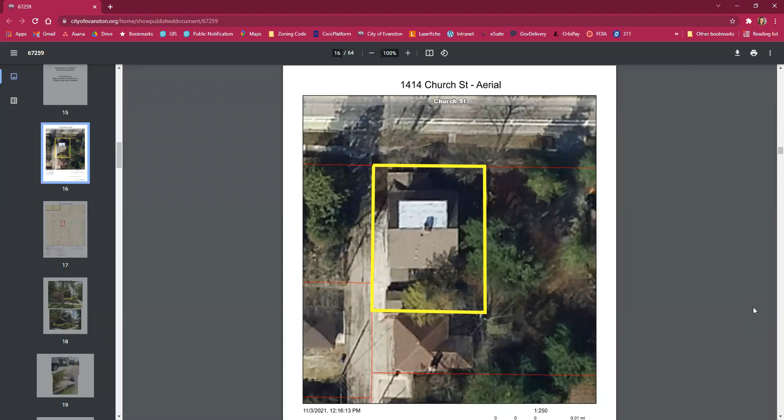Okay, before we launch into this, Cade, you've worked on this, right? Yeah, correct, I help guide the applicant through the HPC process. Okay, and then Katie Ashbaugh, you've worked on this as well?

Okay, yes. So why don't you translate for everybody else what I just said when I read into the record that information. So Cade worked on this with regard to the certificate of appropriateness that's required from the Preservation Commission, and this also requires zoning variations.

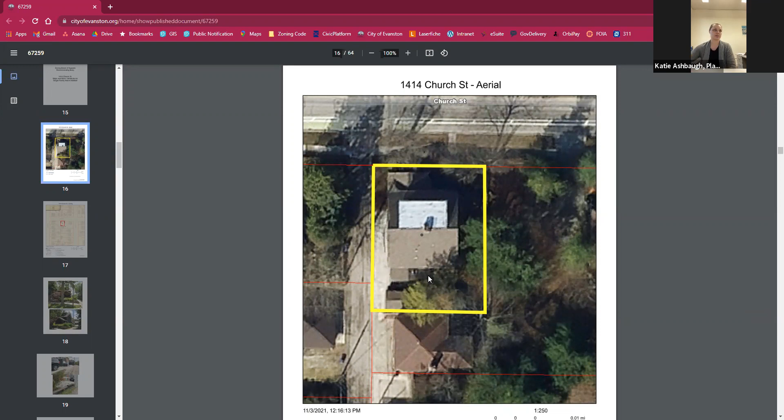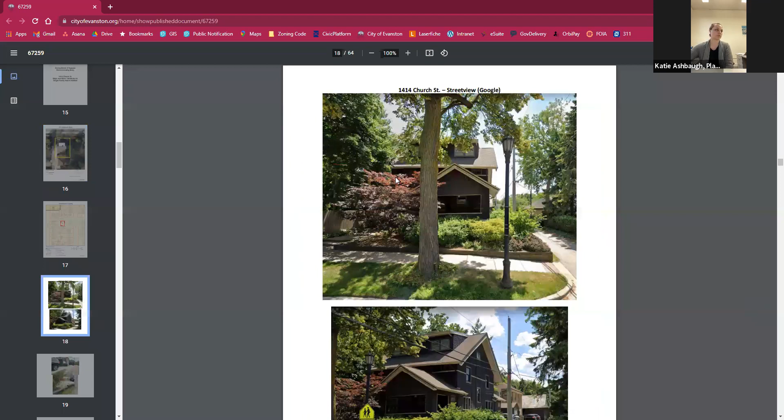Essentially they have a non-conforming detached garage in their rear yard to the south of the existing house. They're proposing to demolish that garage and build an addition to the existing house so that the garage is now attached. The attached garage will make the principal structure 3 feet from the rear lot line.

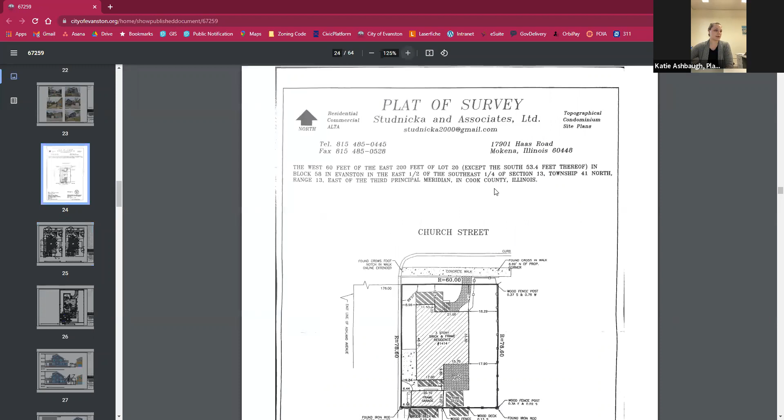Where a setback of 30 feet would be required. Let me see if I can zoom in on the plat to help with this a little bit. So here's the existing detached garage. It's less than 3 feet from the south lot line, which is non-conforming.

They're proposing to - I think this is the better sheet - demolish that and then attach the garage, which would also be a 2-car garage. Right now there's also open parking pads to the west of the house that were actually denied prior, and it appears that at some point the property owners installed them without a permit.

So the impervious surface was not what we would consider legal non-conforming. I spoke with the architect who will be presenting later, but he is now proposing to remove those - they weren't allowed regardless - but their impervious surface is still a little bit over what would have been allowed, and their building lot coverage is also exceeding the maximum permitted. That's kind of a summary without the exact math, but the architect Dan Tornheim is also on the call, and he can perhaps explain the need for this improvement and what the homeowners are hoping to do.

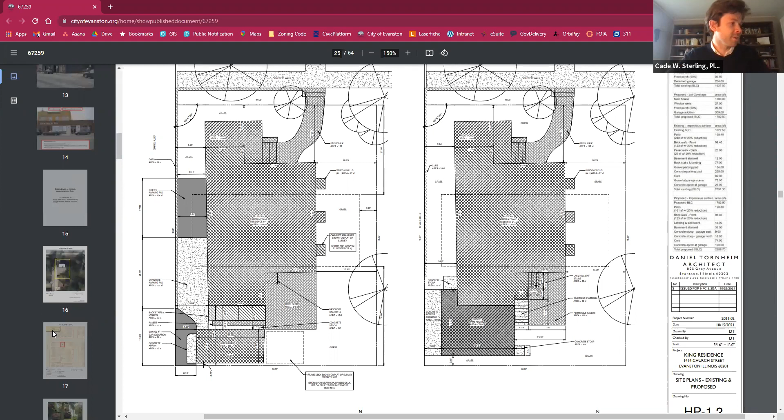And this parcel was actually subdivided at one time from the adjacent parcel to the east, sometime in the late 1800s. Our records initially show that it was constructed as an accessory building for that home on 1632, and then at some later time was converted to single family use. It's seen pretty significant alterations, primarily in the 1950s. It is a significant structure.

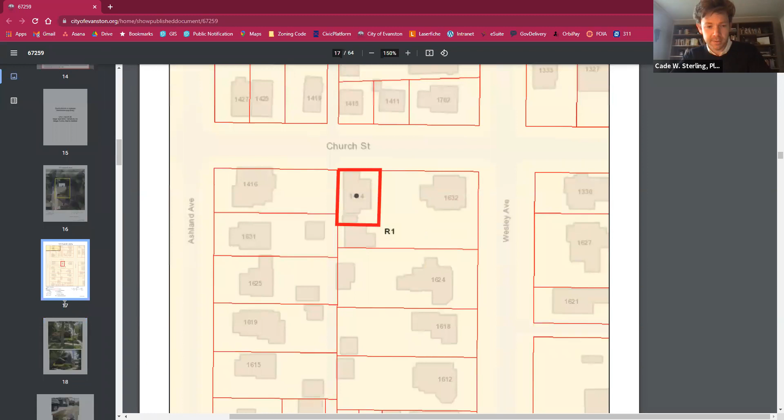It was built in the 1890s by Myron Hunt, a pretty significant architect, and it's in the arts and crafts style. The Preservation Commission last night reviewed the application, including the application for major zoning relief. They ultimately made the decision to give a recommendation of no recommendation - so neither a recommendation for nor against the proposed zoning relief. They did approve the request for a certificate of appropriateness with conditions that the applicant reduce the depth of the proposed eaves, which were originally drawn to match the existing principal structure, I think around 2 feet in depth.

Reducing those, they felt, would provide an adequate relationship between this structure and the proximate coach house to the south, which is also legally non-conforming. It's access stair, and then there's two canted balconies that are on the lot line.

So right now, if I remember correctly, the detached garage is less than a foot away from that structure.

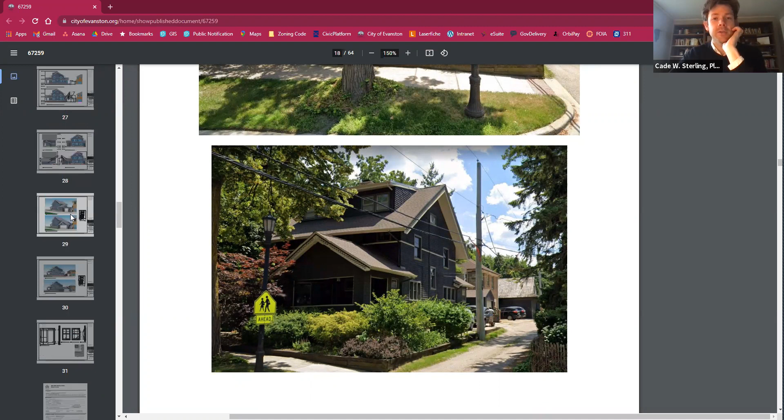Other than that, ultimately they determined the height of the proposed addition, including the roof pitch and ridge heights, were compatible with the coach house to the south. They also determined that the relationship between the two and the open space between, as proposed if they reduced the eaves, was appropriate.

And finally, the scale of the structure they also found to be compatible and appropriate. So in terms of recommendation, we started to get into the weeds of what the need was or what the hardship was, and they ultimately determined that those kinds of questions, including the alleged hardship, were outside of their purview, and they wanted to defer that to the zoning board without a firm recommendation.

Thank you both. Dan, do you want to add anything to that?

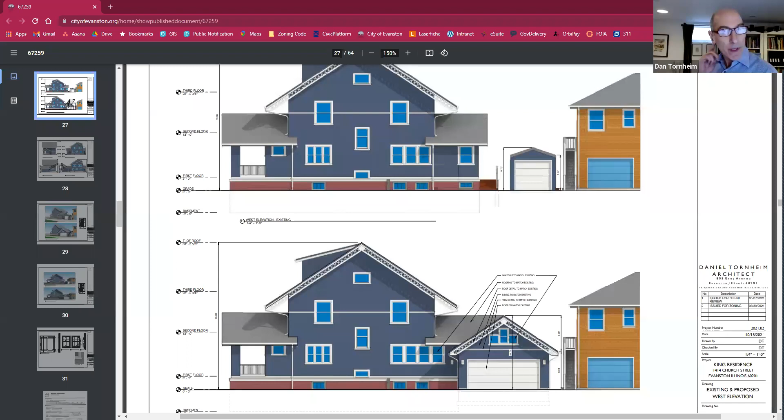Yeah, maybe we should take a look at the site plan, because I think it's helpful to see what the possibilities are in terms of the location of a garage on this property, which was one of our biggest struggles when the client came to me and said, I would love to see if we could get a two-car garage on this property, something similar to the neighborhood.

Most people have a two-car garage. And I looked at it, and some of my initial thoughts were placing the garage in maybe the northeast quadrant of the property. But the problem is that the house is just under 19 feet away from the property line. Can't really get a good two-car garage in there in that distance. It would require a curb cut off at Church Street, which ultimately I thought probably isn't the best solution.

I've got an alley I can work with. So I also thought about placing the garage in the southeast quadrant, but that's basically the yard.

That's where the kids play, that's where the family hangs out, that's where their patio is. So it just kind of ate up all the yard space, and it was closer to the neighbor's principal structure to the east. So I thought maybe the best opportunity would be to attach the garage to the principal structure, and that's where I'm proposing it now, in the southwest quadrant of the property.

One of my concerns was, I wasn't going to place the garage directly on top of the existing foundation of the one-car garage. It's too close to the property line, like 0.77 feet away or something like that. So it's under a foot away.

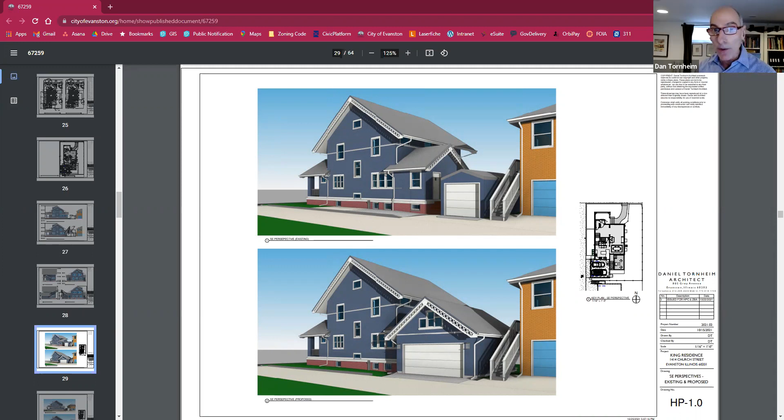Yeah, I mean, I'm not opposed to bringing back the eaves even more. I don't want to mess up the look of the structure. I don't think it will, because the eaves on the principal structure are pretty big. The porch in the front is where I took the eave dimension from to emulate to the garage. So it's like a 2-foot overhang right now. If it's at a 6-inch overhang, I'm not opposed to it. I don't know what historic preservation would say, but I'm okay with it.

Barring any other questions, I'd like to make a motion to send a positive recommendation to ZBA for 1414 Church Street. Oh, there is one thing I just thought of, and I apologize, but I want to note that downspouts have to stay on your property. They can't be sending water to other people's properties. So just be very cognizant, particularly at the edge of the garage, of where the downspouts are going.

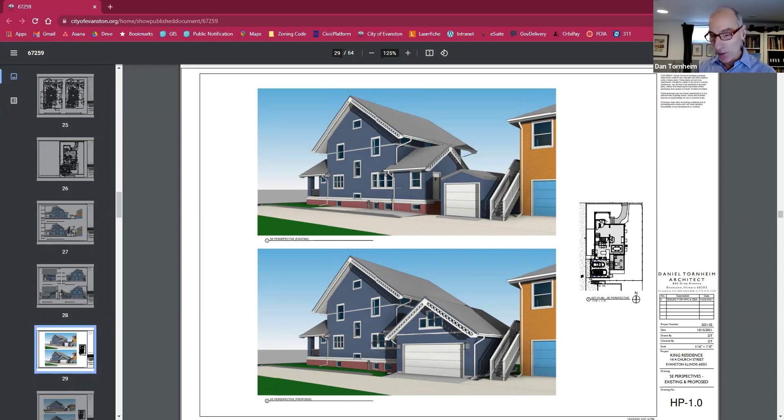Can I just comment real quick, Laura? I was going to mention, I tried as best I could in the rendering to show that the downspout splashes on grade, but towards the alley. That was my best shot at trying to get water off that roof in an appropriate manner. I don't know if it's real clear, it's maybe hard to see. I don't know.

So it may be necessary. I'm just thinking, based on the site plan, you may be wanting to send downspouts back to the yard. I know that causes the yard to flood somewhat, but the issue with sending it directly to the alley is we typically like them to be offset from the alley. I'm not sure you're offset from the alley that far, so then it would create like an icy patch.

Oh, yeah, no, that makes sense. I mean, I think that splashing the downspout to the east into the yard, it's fine for us, we don't mind that. It's not gonna cause, I mean, there's a stoop there with a door, but I think it's up high, so I don't think it's gonna really affect things. It's probably, if it splashes on grade at the east of the proposed garage, it'll just drain into the grass. So that's cool, that's fine by us. Okay.

Also as a note, I don't believe that's a public alley there either. That's a private alley owned by the homeowners on the Ashland side. Yeah, I think, sorry, go ahead. That is a source of what neighbors complain about typically, is that your downspouts are impacting them in some way, whether it's through iciness on the alley or through being on their property. So just need to be cognizant of that. Yeah, no problem.

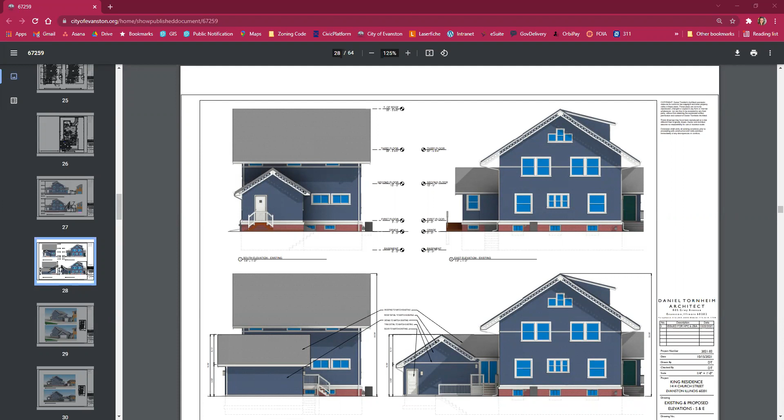Laura, or does anyone on the committee have any ideas for snow accumulation? I know that came up during the HPC meeting due to the pitch of the roof and the proximity to that structure. More of an Edgar question. I don't have any concerns about snow. No, no suggestions from here, especially if that's all private.

I do have one quick question. Sorry, go ahead, Jessica, were you going to comment on that? I wasn't going to comment on the snow, so if you're going to comment on the snow, you should go ahead. Oh, you can make your comment. I was just going to say, it's not clear to me what the hardship is. There's been a conversation around the other neighbors have 2-car garages. That's not a hardship, and so the hardship is not clear to me.

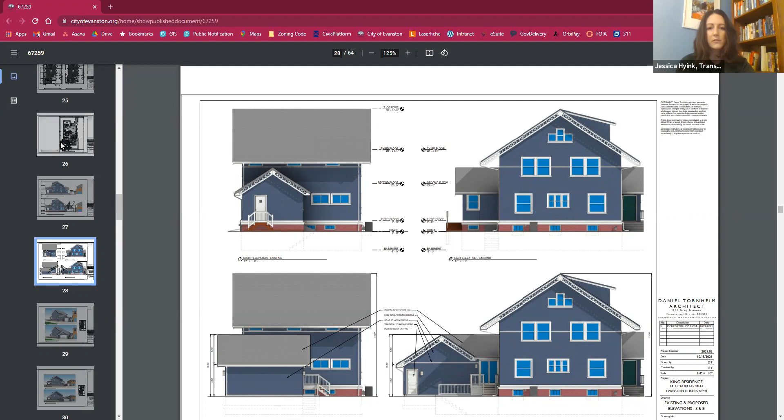Hey, do you want me to talk about that at all? I'm not sure how to respond, to be honest with you. Is this something we really cover in this committee? I think there's some benefit in providing more distance between the coach house, the adjacent coach house, and the garage. I think the current situation is clearly not ideal, and I think providing more space, whether it's just 2 feet, I do think there's some benefit in that. More space could be added by just having a one car that's attached, so eliminating, there's not a need or a hardship for a 2-car garage. You could create even more space between the buildings by only having a 1-car garage.

I think that, Jessica, you're correct that the degree of the variation that they're requesting with the rear yard is pretty large, but the detached garage would still need to, if they were to not attach it and then maintain a 1-car garage, it still would need to be 10 feet from the principal structure, but also 3 feet from their south lot line. Obviously there's not a site plan for that right now, but it would still need a variation for that, although it would be a minor variation. And I think the existing detached garage is closer than 10 feet as it is, so it's non-conforming. And if they were to attach it, it still would probably need a major variation just because there's technically no rear yard. But I would concur that the degree of the variation and the need for a 2-car garage could be explored a little further by the applicant.

On the other hand, the applicant is investing a significant amount of money to get a 2-car garage, but they're also removing the parking pads, which will improve the impervious surface situation. And so, rather than resist this proposal, I'd rather support it, even though it gives them a 2-car garage, in order to allow more green space for water infiltration.

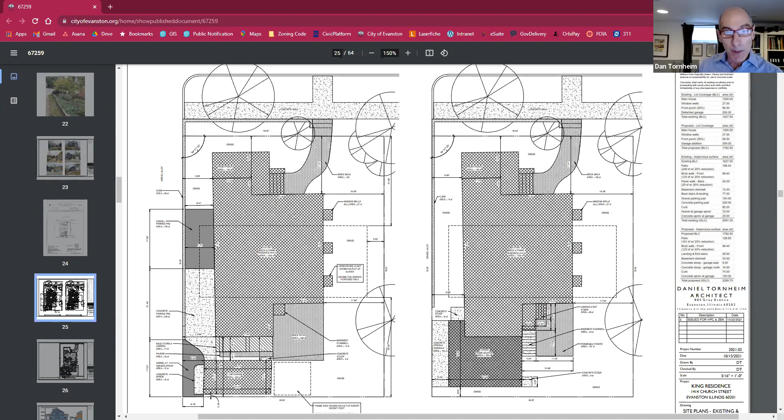I think I remember that a single family residence requires 2 off-street parking spaces. That's challenging with even the existing property configuration, given that we've got parking pads that aren't allowed. I got a 1-car garage that probably will fit only a Model T Ford and nothing else. So it's just a challenging site. I just wanted to add that.

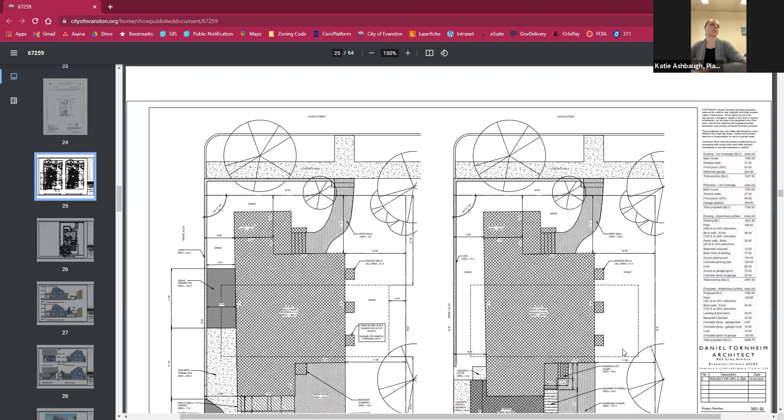I would note that the plat of survey provided with this shows the concrete parking pad, and that's from 2018. I'm not sure when your clients acquired the property, but that concrete pad was at least there in 2018, and then it's since been expanded to show the gravel, which I think I included photos of in the packet. So I guess to your point, it just depends on when they technically acquired the property, and they didn't install the concrete, but they did certainly expand it.

Yeah, I'd have to ask the owners. I think they said they purchased it a couple of years ago. I could be wrong, I don't want to speak out of turn on that, but they haven't owned it for 15 years or anything like that. So yeah, I think they inherited at least the concrete. I'm not sure how the gravel got there, but it's possible they did that. I'm not sure.

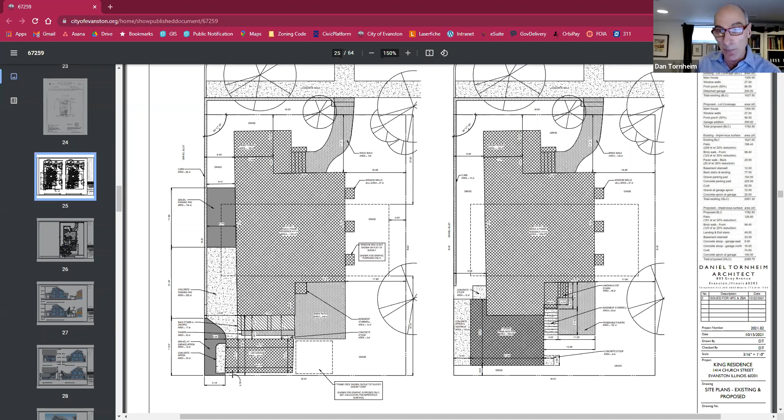Before we make a motion, is there anybody from the public who'd like to make a comment?

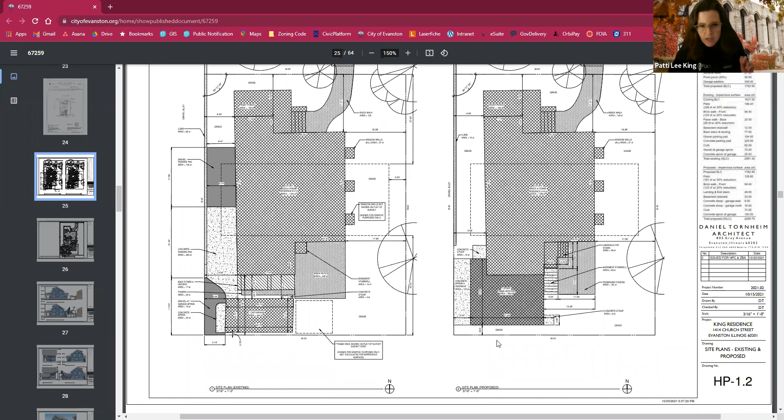Hi, I'm Patti Lee King. I don't know if I'm considered the public, but I am the owner with my husband Corey, and I can answer the question that's been asked if it's helpful. So we purchased the house in April of 2018. Both the concrete and the gravel were in place when we purchased the home. We did not know, I guess we could have looked into it at the time, but we did not know that they were illegally done until Dan submitted the plan to your office.

Google Street View looks like some work was done somewhere between 2007 and 2011, if you go through the old Google Street Views of the property. Just FYI.

So I think my takeaway is this lot is a very strange shaped lot. It's a challenging lot to do much on. There's no street parking immediately in front of the property. It's a busy street, there's a bike lane, so it's obviously well served by other transportation options. And it's near downtown, so it's close to public transportation.

But as we've learned in other properties, 2-car garages are often desired and part of the new construction and what is expected in Evanston for new projects. So I don't know, I think that the lot creates a little bit of the hardship here as much as anything else. So I don't know if anyone else has any other comments, or if Laura, if you had a motion.

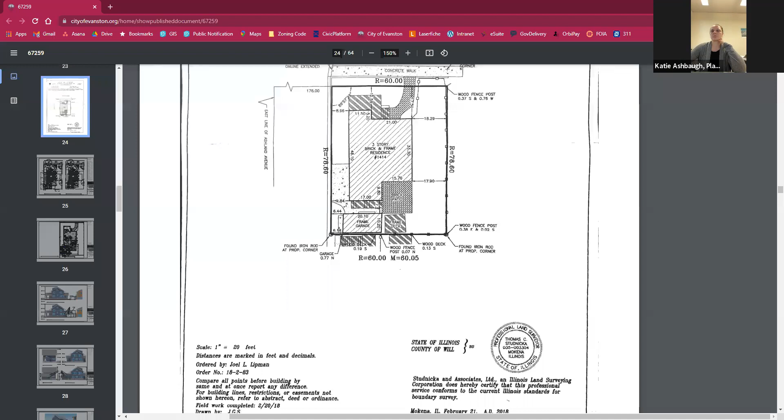Motion passes. Okay, great, all right, just double checking. There's nobody here for 1028 Chicago Avenue.